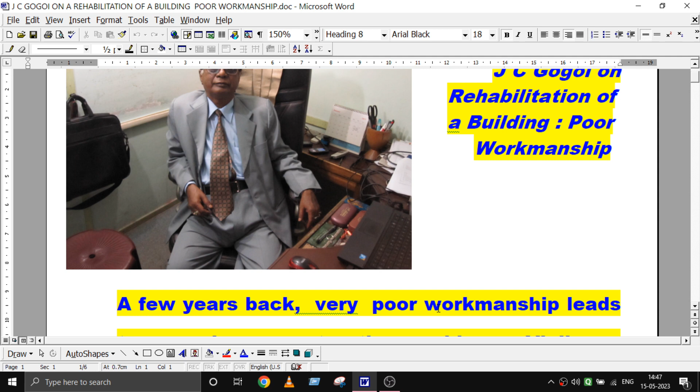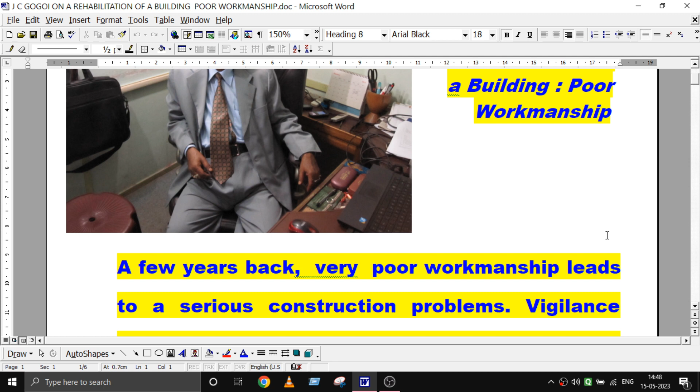Today, I want to say something about the poor workmanship in building construction. A few years back, some residential building complex was constructed at Aparasam. During construction, after removing the formwork, that means after removal of shuttering, some weak portions were noticed. In fact, the matter was so serious, it led to some vigilance inquiry, some official inquiry, since it is some government sponsored company's building.

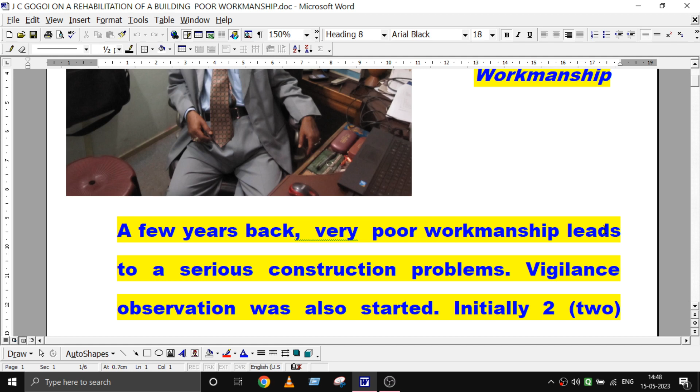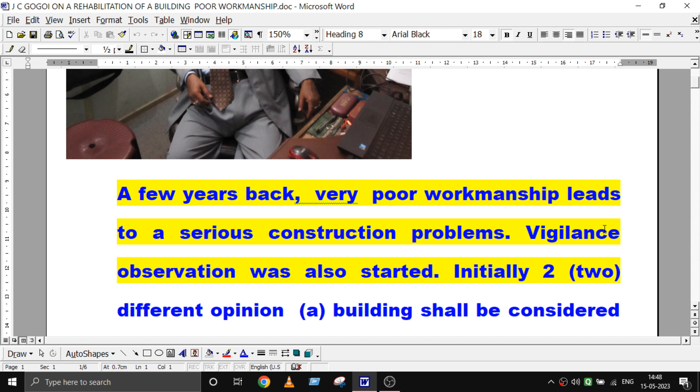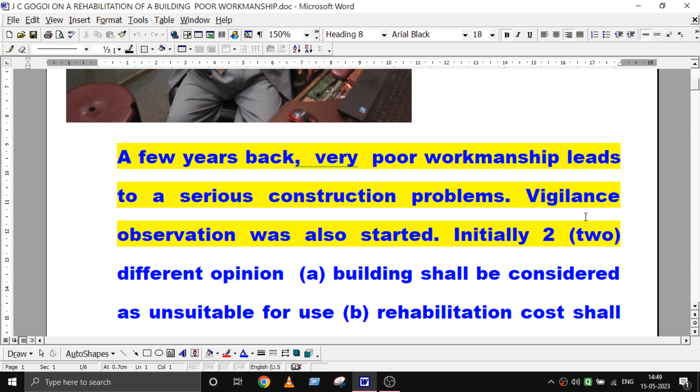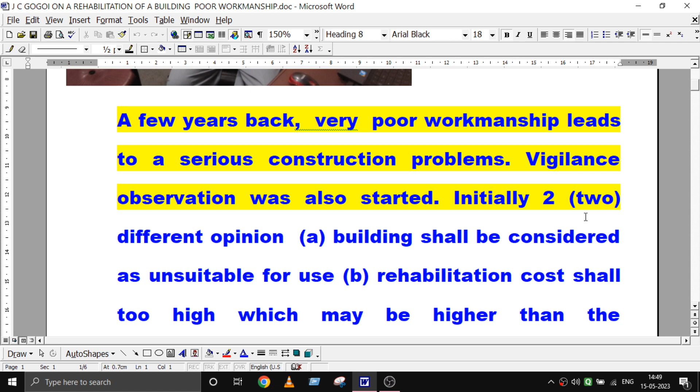During preliminary investigation, there are two observations at the initial stage. One is the building shall be considered as unsuitable for use. Second opinion is rehabilitation cost shall be very high, which may be even higher than the reconstruction works. In both cases, question of responsibility and question of accountability is coming out.

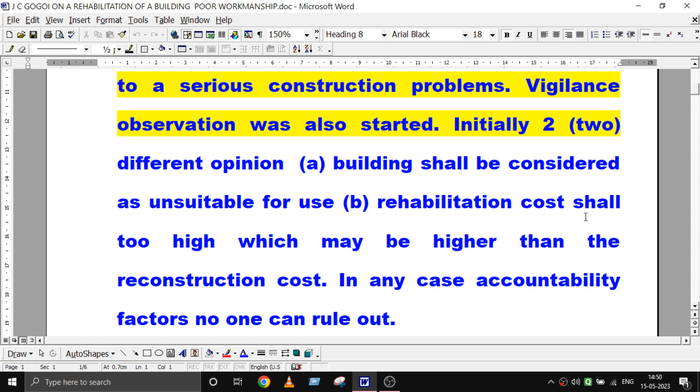It may so happen the builder may lose a huge amount of money, and the supervising authorities, there are some official engineering staff there, will be suffering in service record, maybe some temporary punishment also. A team of experts, all are experts except me, having different opinions belonging to this group. One group is saying the building is not suitable, it should be declared as a damaged one. Another is rehabilitation cost may be too high.

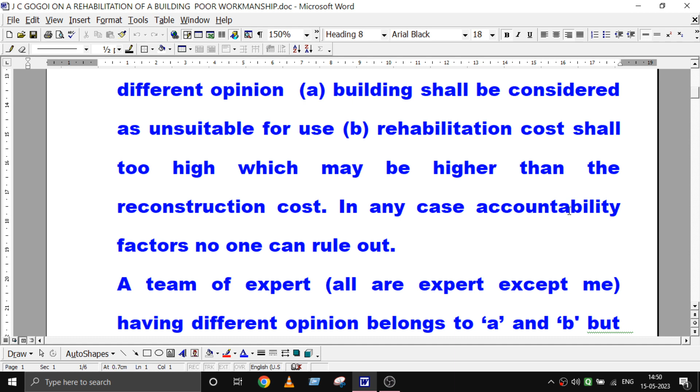But after a lot of discussion, visits after visits to the building sites, finally it has been decided that the rehabilitation cost shall be less than 30% of the reconstruction cost. So if it is less than 30%, then it can be considered as an alternative. There are some government procedures also. If it is higher than 30%, they do not want to accept it because that will be a question of responsibility and accountability. So if it is below 30%, there can be some adjustment and it shall be considered as a working defect, defects which can be permitted.

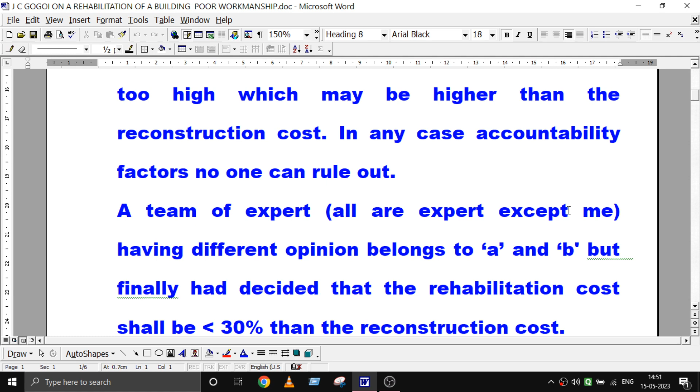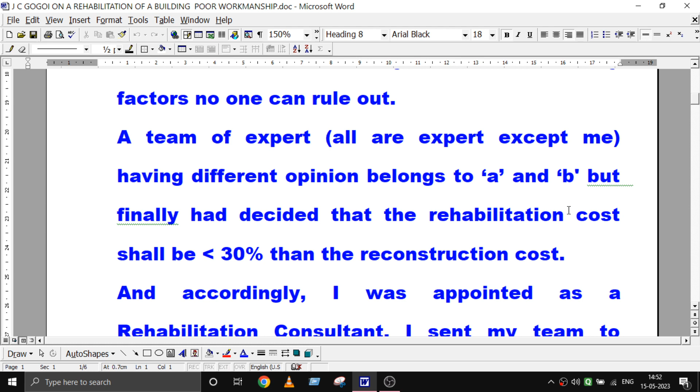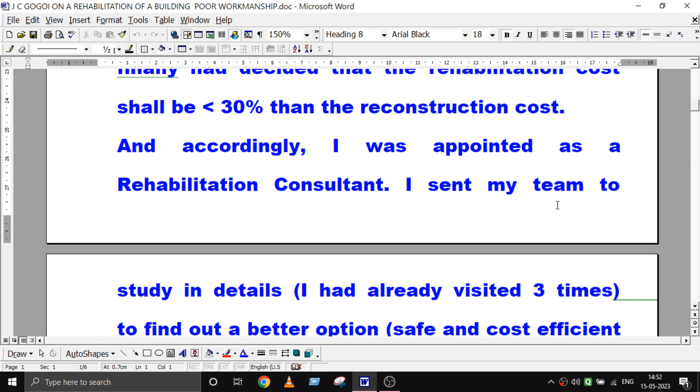Under such cases, I was appointed as a rehabilitation consultant. I visited more than 3 times before my appointment to find out the basic reasons of this type of poor workmanship. After appointment, I sent my team to study in detail to find out the better option, which must be safe. Safety is the prime factor, and cost efficient. If we go for jacketing the whole structure using high grade of concrete, it will be undoubtedly safe, but it will not be cost efficient. Safety, although prime, should be cost efficient.

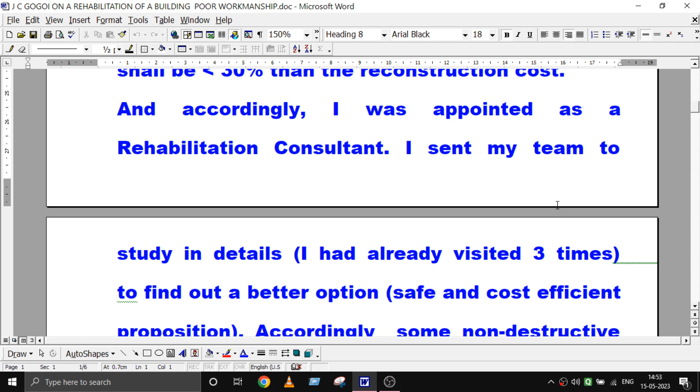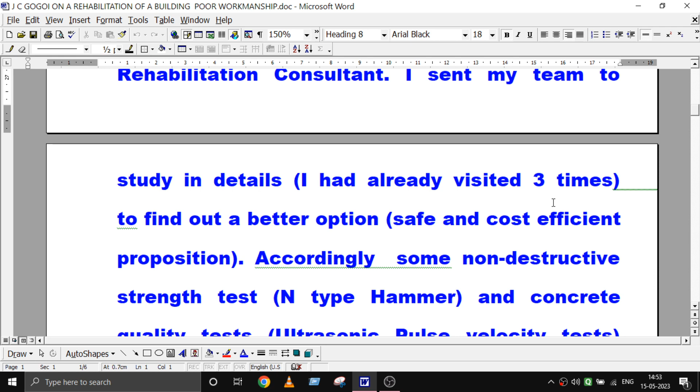So I asked my team, three engineers and two other skilled workmen, to find out all details, and accordingly they conducted some non-destructive tests using rebound hammer for strength and ultrasound tests in some other locations. Not everywhere the building is poor. Somewhere it is poor and somewhere it is above standard. So we conducted the tests, and our recommendation was the building was very nicely designed.

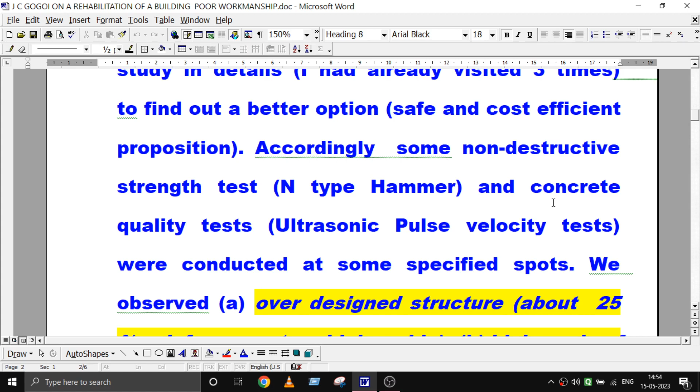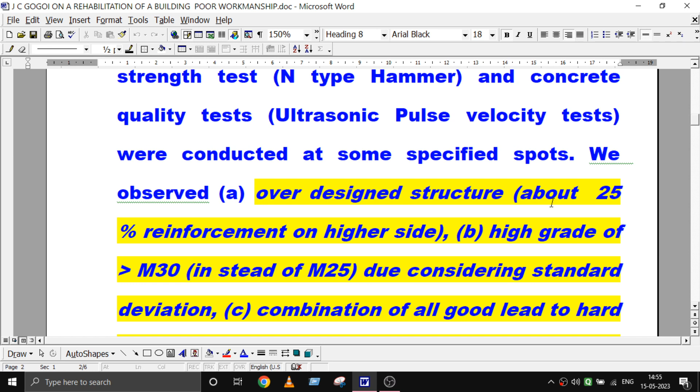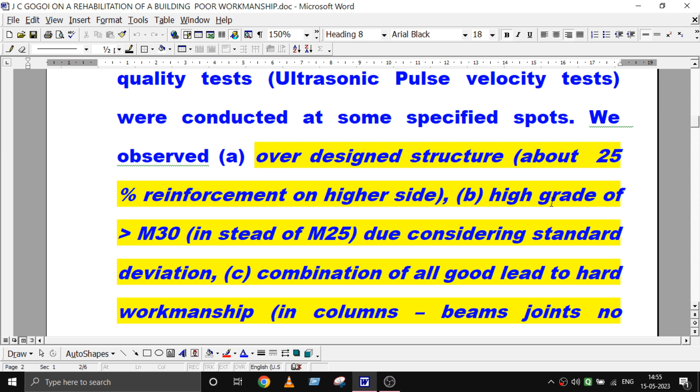The design was an over-designed structure. Reinforcement is 25% higher. Concrete grade was designed for M25, but concrete grade found as M30 considering the standard deviation. And the concrete became so good, and it is the combination of all good that led to hard workmanship. Undoubtedly it is poor workmanship; it is very hard workmanship. Concrete workability is very low.

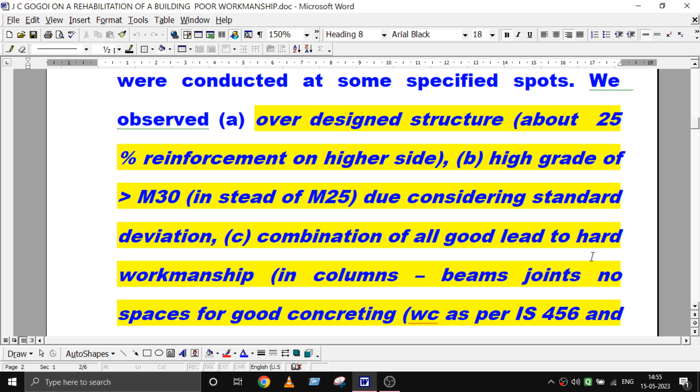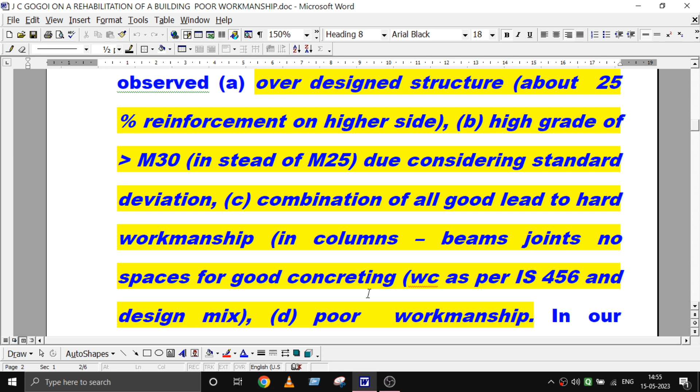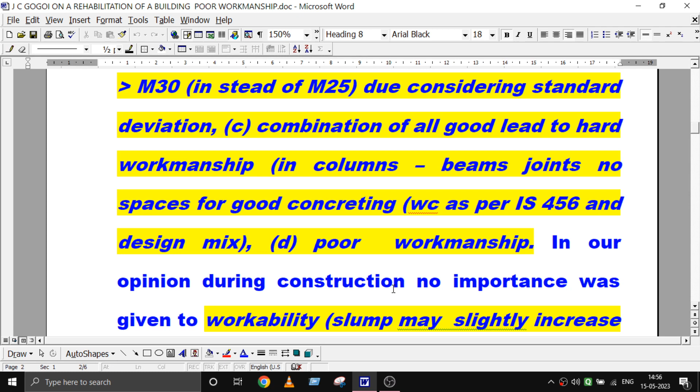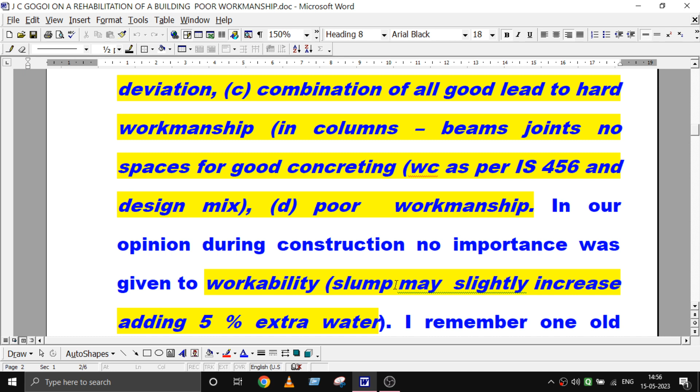In column beam joints, there is no space for good concreting. W/C was maintained as per mix design or as per IS 456. So all this leads to poor workmanship. In my personal opinion, during construction no importance was given to workability. Slump may slightly increase by adding 5% extra water. This will not affect the effective concrete grade.

We remember one old saying, goodness makes worst. If all are good, everything is good, it may turn to worst. There is a Hindustani word, Hindi word, for this.

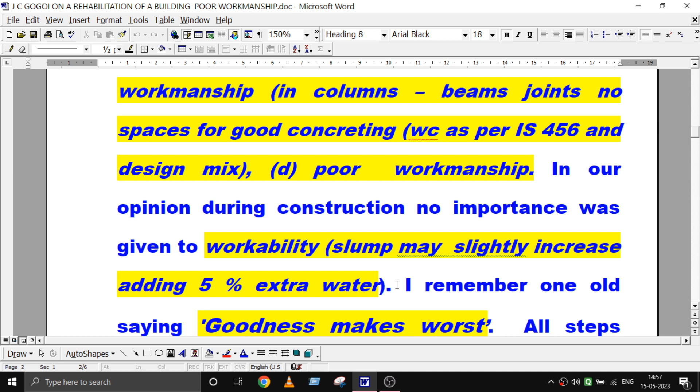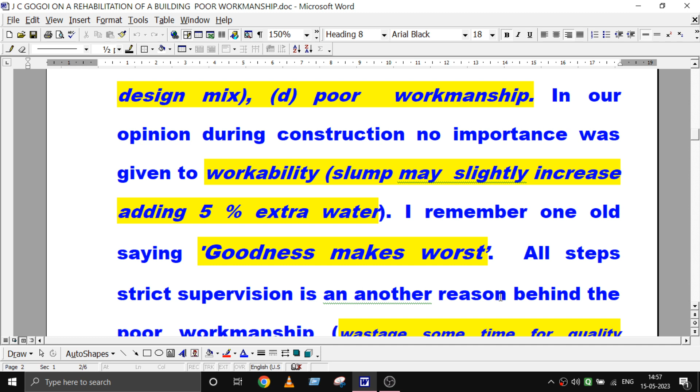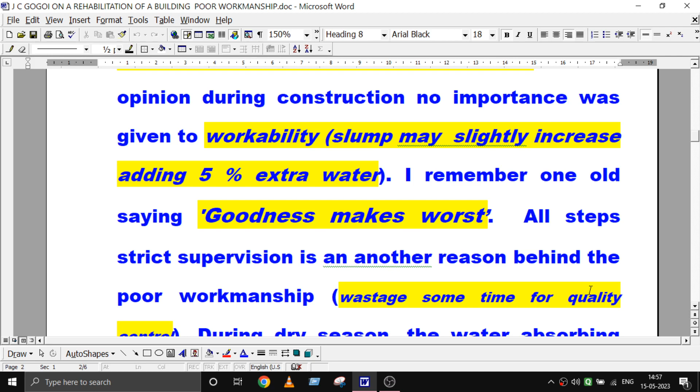See, all goods make worst. Strict supervision at every step is another reason behind the poor workmanship. Strict supervision is necessary, but wasting time on quality control is harmful. Check the slump and concrete mix properly once in the morning. When the material is the same and W/C is the same, the slump will remain constant.

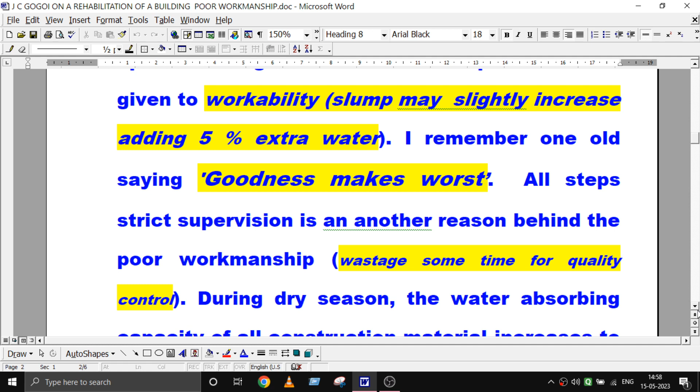For each mix, if we are going to take the slump of each concrete, then it will waste a little time, because slump is an important factor during concreting in dry season. During dry season, the water absorbing capacity of all construction material increases to a high extent.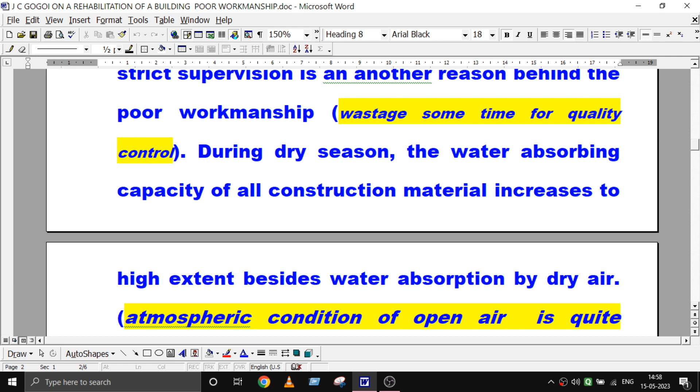Atmospheric condition of open air is quite different from that of laboratory control condition. We should not forget that laboratory atmosphere is controlled. There will be no water absorption. It is already in such a condition that there shall not be any water absorption. But in open air, when concrete is mixed, during that time water absorption shall be there by dry air. So just to take slump, if we require 2 minutes, during that 2 minutes, slump may decrease to a high extent. It became hard.

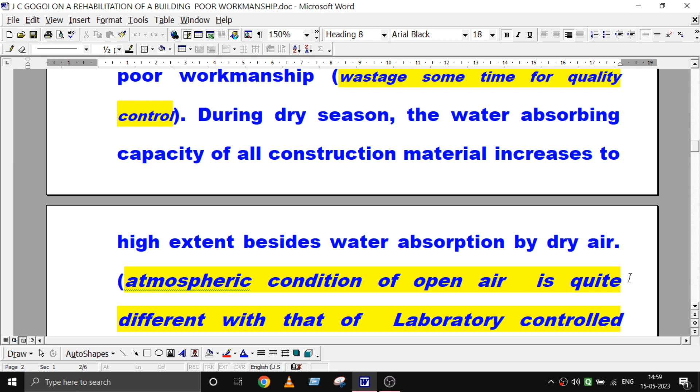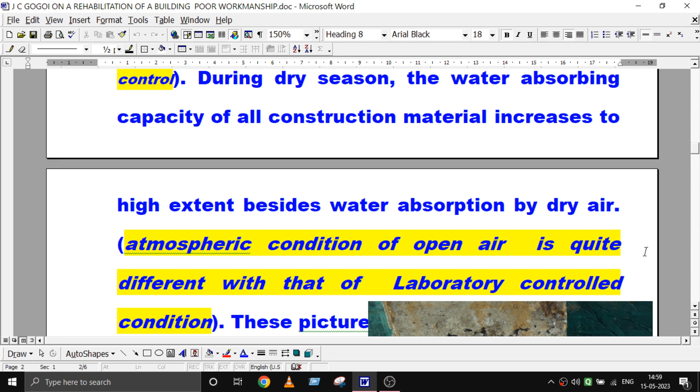So these are our primary observations. Now you see these are the cracks in between column. Because you see this reinforcement, this reinforcement, this reinforcement, and this reinforcement. So many reinforcements are there. You see here also 1, 2, 3, 4, 5. Somewhere where joints are there, gap is decreasing, and these are the stirrups, these are the stirrups and cross stirrups also there.

So how can concrete penetrate? Because all the aggregate sizes are 20 mm down. When it mixes with some amount of cement and sand, it becomes 20 mm to 25 mm, and our gap is very less somewhere. Where joints and lappings are there, in that space, the chances are very less for this concrete to penetrate.

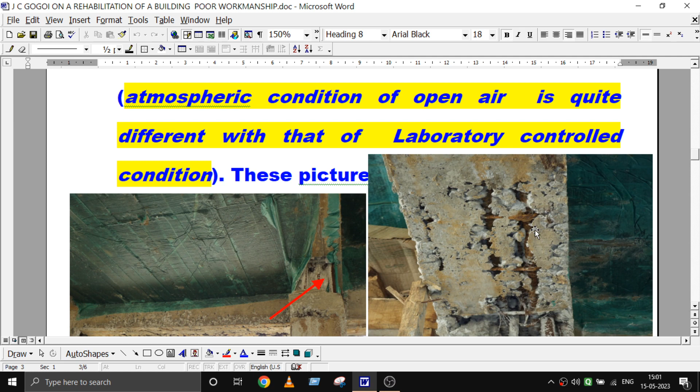So this is one, here it is, because as I told, slump is decreasing due to atmospheric condition. So up to this extent, concrete started initial setting due to dry air condition. Concrete already underwent initial setting. So the chemical reaction between cement and water started. So it became a void.

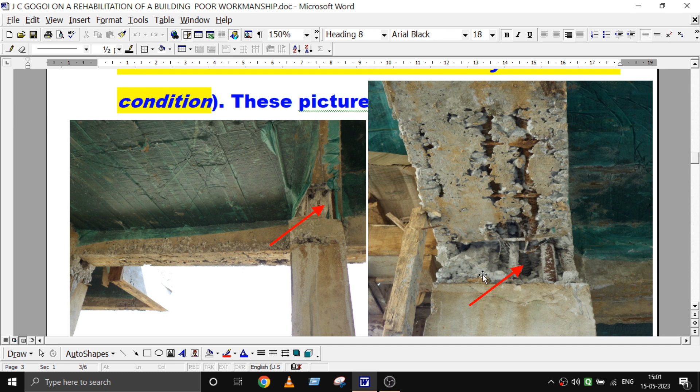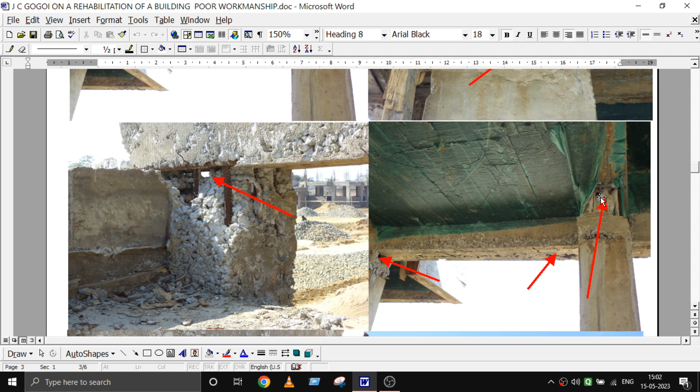This is also, here it is, this is beam slab, where first it should penetrate the beam, second the slab, then it is coming through beams, then it is coming to column. This is column, beam, and slab. So concrete cannot come here. Before that, in this state, concrete has stuck up. So these are the voids. Here also, there are some voids. Here you see the same condition. Same condition.

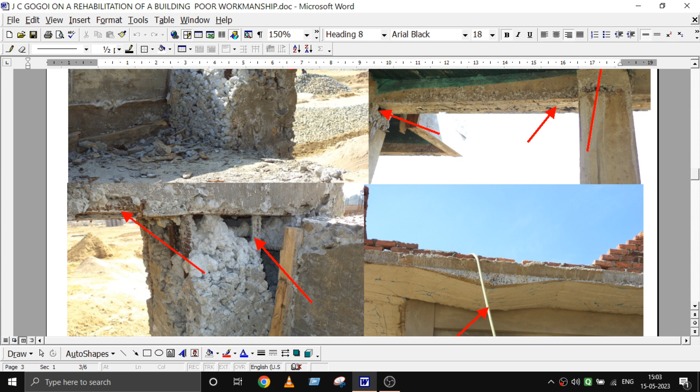They used steel shuttering and timber shuttering, both shutterings they have used. Here, during removal of shutterings, this concrete stuck to the formworks and it took this shape. This is also, and here it was sagging down. It is due to some additional extra load on these formworks, so it is sagging down.

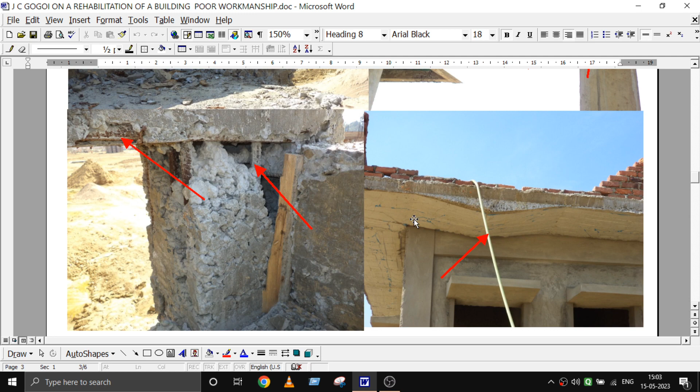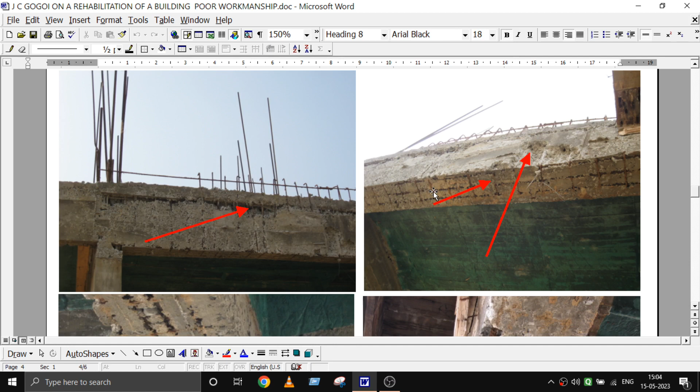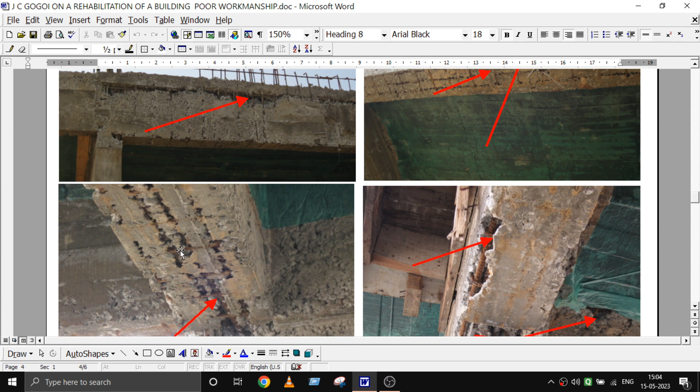Here you see, it looks like they are not using the vibrator, but they used the vibrator very perfectly. In our initial investigation, we discussed each and every one. So we find they are using this vibrator, but all these became voids. Here also you see concrete is not coming from the upper side. Here you see this is also, here a big hole is there, as if it remained unconcreted.

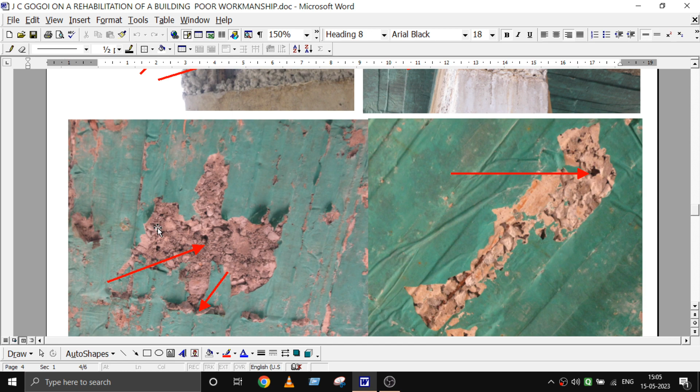These are only aggregates, fines are not going there. Yeah, you see, these are only aggregates, no fines are there. This is the state of the building. We have conducted load test on slab at the better portion. Some better portions are there. We have conducted load test on slabs.

Fortunately, no deflection was noticed up to a load of 500 kg per square meter. As per IS code it should be 450 kg per square meter, and permissible deflection is a few millimeters depending upon width and length of the slab. But here we do not notice any deflection, so it is an over-designed slab. Putting some wooden board is sufficient. So we do not worry about anything.

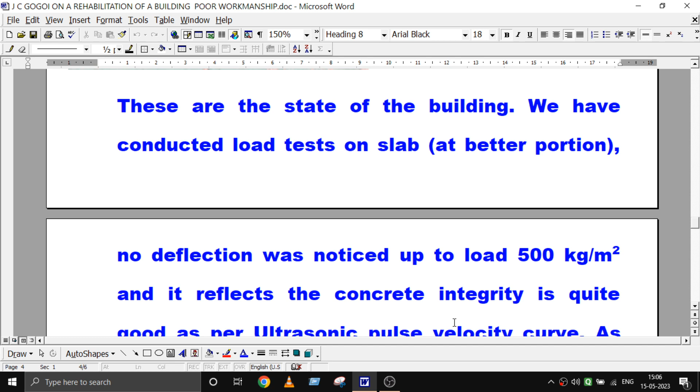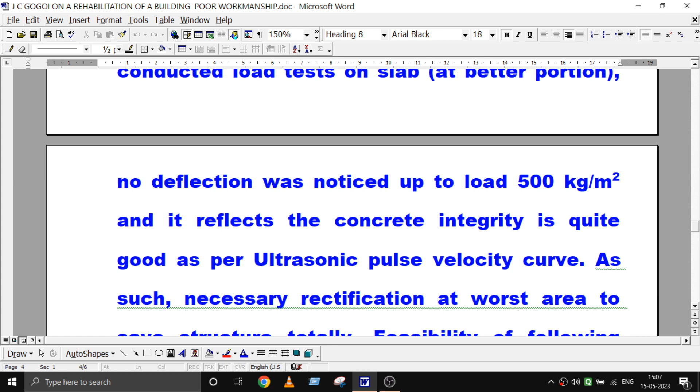These results also reflect that the concrete integrity is quite good, and it is as per our ultrasonic pulse velocity test also; from that curve, we noticed all are in the good portion, all are excellent quality of concrete. Somewhere it is 4 kilometers, somewhere it is 4.5 kilometers. In no case is it less than 4 kilometers. As such, we find rectification at the worst area necessary to save the structure. It is totally possible.

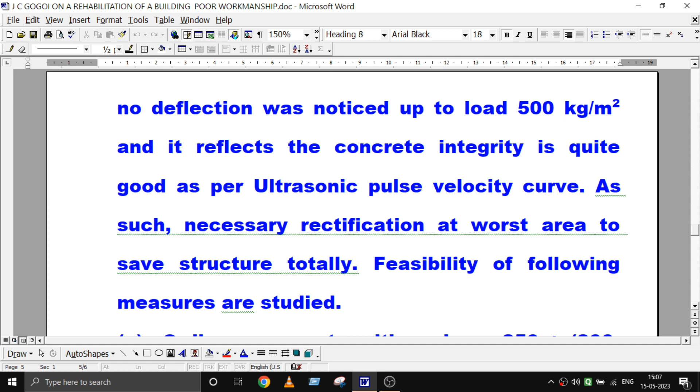Normally we prefer 150, and in worst condition it will be 175; 175 and 150 is preferable for our workmanship. But in this case we want to make it semi-solid, it shall be on the higher slump so that it can penetrate using some funnel type instrument so that we can penetrate it like water.

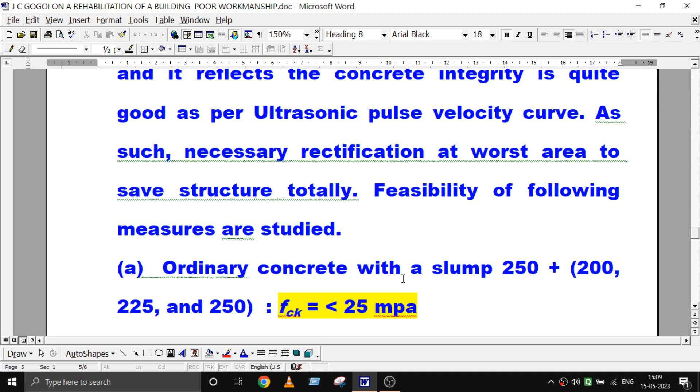Second option, epoxy grouting. Epoxy grouting is the best option for rehabilitation of RCC works. Its strength is 20 after 24 hours. Strength is more than M75.

But it is too costly, since special professional agencies should be engaged. They always take the higher side, which is ordinarily much costlier than other treatment. So we considered epoxy grouting to be very high in cost and inefficient, so we ruled out that chapter.

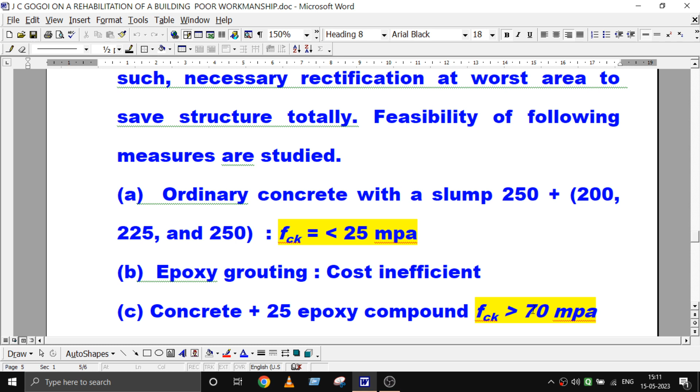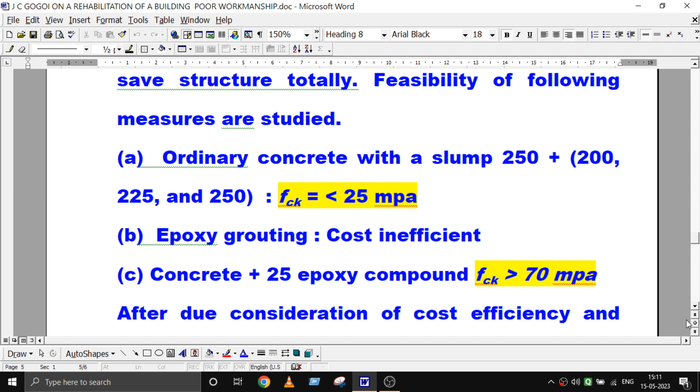So we studied these three options, and after considering the cost efficiency and the execution suitability, because everyone has complained against the consultant. It is very easy to say or write or draw with a pencil. Instead of an RCC 32 rod, a consultant is just using a pencil, and in 1 second there will be a line. There will be a rod, but it is on paper.

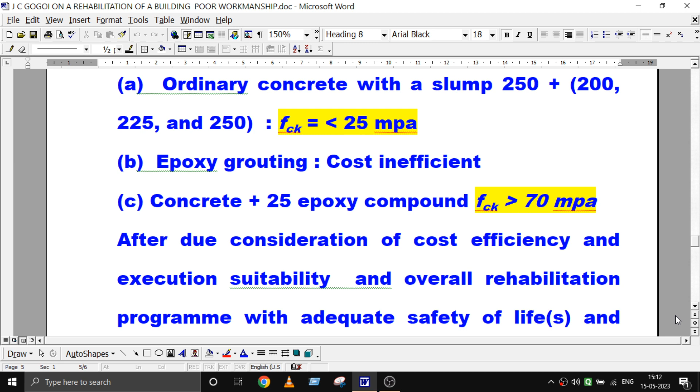So in consultancy, we are not investing much money. So all have some complaint that what consultants say cannot be done practically. So I have a peculiar concept: it must be execution suitability. Unless execution suitability is there, no one can do perfect work. It is my concept. So our prime objects are safety, cost efficiency, and execution suitability for the overall rehabilitation program with adequate safety of lives and property.

So what we suggested, in our group, we have one chartered engineer and two young engineers. They are also working very hard. In our opinion, M30, that is to get M25, M30 concrete, and the gravel size, instead of 20 mm, should be 12 mm down graded, less than 12 mm, 12, 10, 6, like this type of gravel. It should be uniform. Not all should be 6 mm; 12 mm graded downgraded gravels.

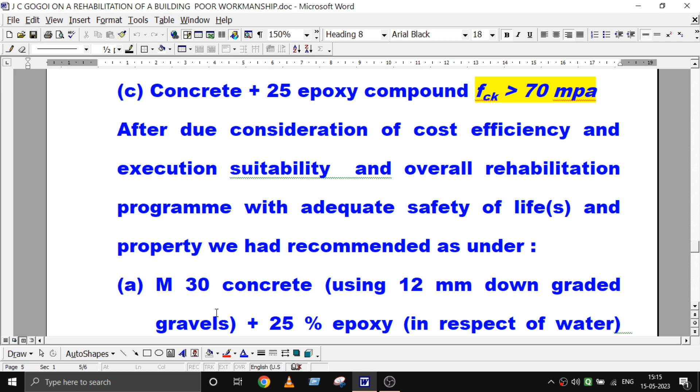Normal concrete for M20, M30: what percentage of gravel is required, how much sand is required, and the water-cement ratio remain as they are. But in addition, say the water required per bag of cement is 18 liters, or 20 liters, whatever it may be, preferably 18 liters per bag is good enough. And with that, we add 25% of epoxy in respect of water only, not the volume of the total concrete. If you use 18 liters per bag, 18 liters plus 25% of 18 liters of epoxy, we should make the concrete.

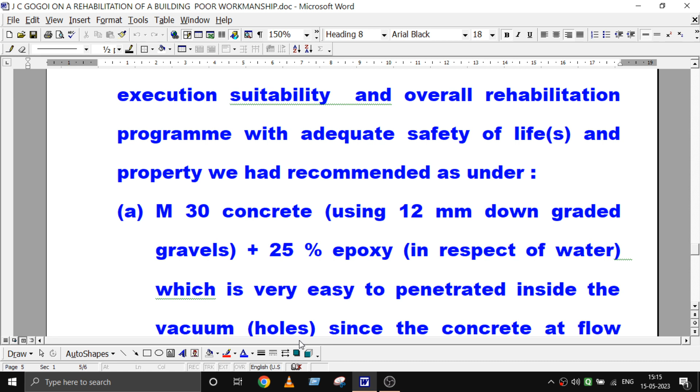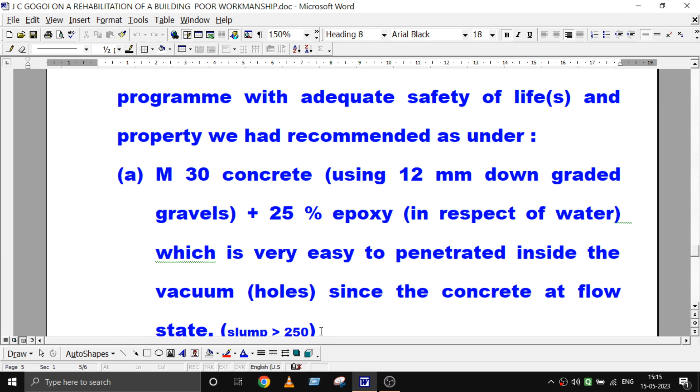It is very easy to penetrate inside the vacuum holes, since the concrete at that state will flow like a semi-liquid substance, with slump 250 onward; it should not be less than 225. We recommend 250. Slump shall be 250, greater than 250. In such cases, what happens? Initially, some repairing works on joints were conducted in my presence. It is very smoothly and properly workable.

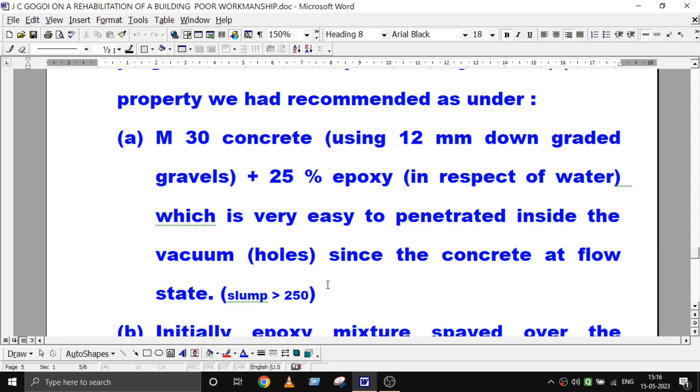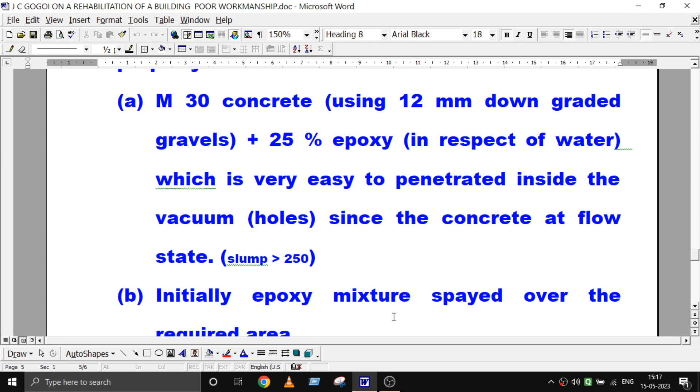And initially, half an hour before doing anything, the epoxy mixture. In epoxy there are two parts: one is hardener, another is adhesive, both mixed in equal 1:1 ratio, 1 kg to 1 kg. That mixture shall be sprayed over the required area as the first step. The spray machine is very simple, hardly 7,000 or 8,000. The only problem is mixing and cleaning the instrument. Proper mixing and cleaning of the instrument is the major requirement of that spraying.

Next, cement mortar. There are some areas we saw where the strength of the slabs at the upper side is quite perfect. Only in some lower portion, where loads are transferred to reinforcement which is not duly covered, we suggested that the cover may be made by cement mortar with 25% epoxy mixture. After spraying this epoxy mixture, plastering can be done with this cement mortar with 25% epoxy mixture. It will be good enough for covering the reinforcement. So this will serve the purpose.

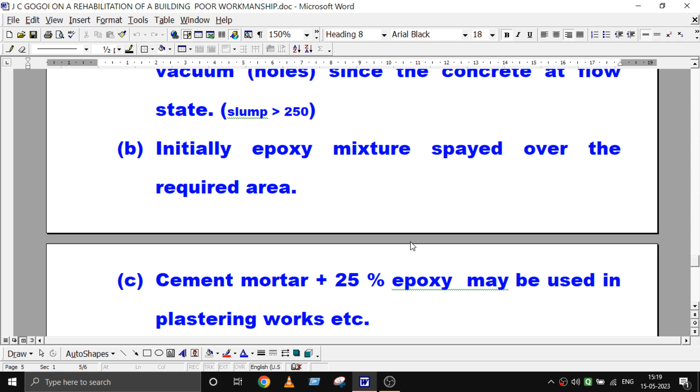This is a simple process. Our total estimated cost is less than 30%. That is also in our mind. We cannot exceed the limit of 30%. If it is 30%, some people will suffer. Some engineers, some builders, some other workmen, they will also suffer. Somebody may lose their service. So I do not want to do so.

So within that 30%, I want to complete everything, which is finally reported to be less than 20%. But it is unofficial information to me that it is less than 20%. But in the written certificate, they said it is less than 30%.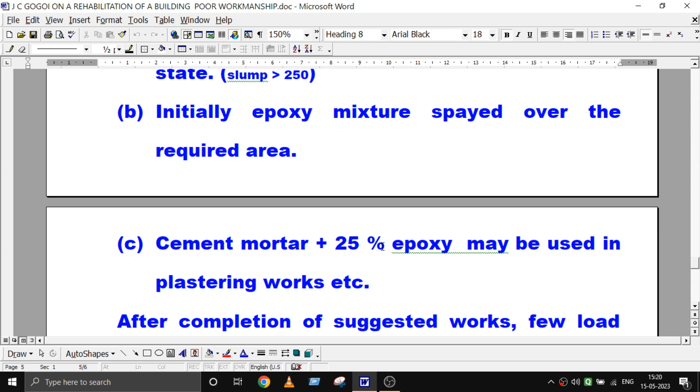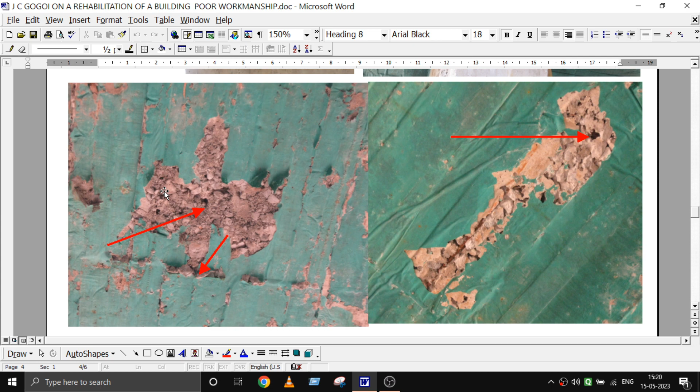After completion of all these suggested works, all repairing works, here I want to show one thing. You see, these are the things. After reinforcement, concrete is there. Outside this reinforcement, no cover is there. Here it is, no cover is there. This can be done using rich mortar. It can serve the purpose.

And here we seal this side and we seal this side also. Then here we arrange one conical flux from where we are pouring down that concrete. In these also, we seal this portion, we seal this portion also, making a V, making an L, not V, making an L, we seal it with an open hole using a conical flux.

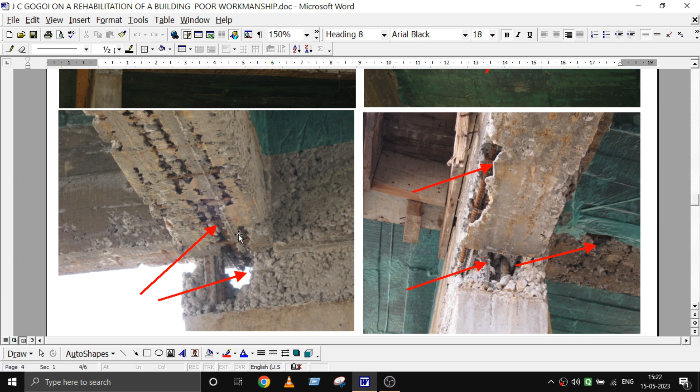We penetrate the concrete mix, which, as I earlier explained to you, the workmanship is very good, and it is a material. This compound has good workability, and its purpose is sealing the voids fully. So this was very nicely completed. The rehabilitation was completed.

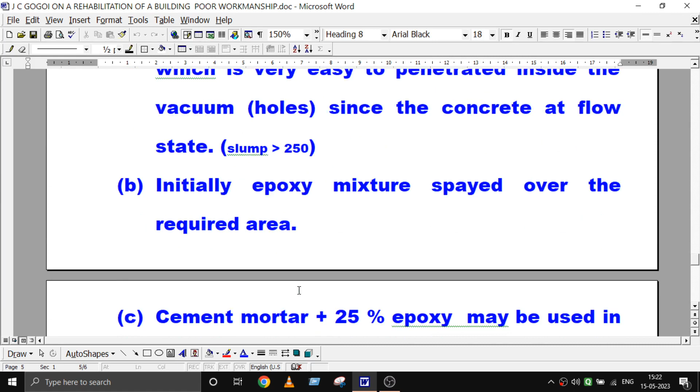So finally, after completion of all suggested works, a few load tests on slabs were conducted more than 500 kg per meter square. No deflection was noticed. Rather, it behaves much better than earlier. Some non-destructive tests, normal strength tests, 150 cube molds are taken at every step, and the tests were also conducted in every repairing zone, every repairing area.

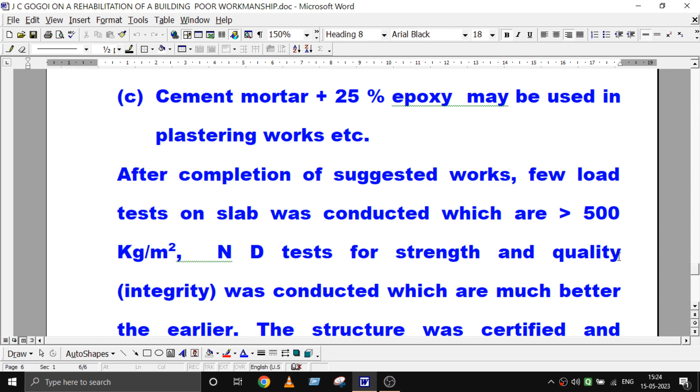Quality, which we normally call integrity, whether any hair-like cracks or voids are there or not, was checked using pulse velocity, which is more than 4.5 kilometers per second. So everything found that the repaired portion is much better than the original one. So finally, on getting 100% satisfaction from the client, we certified the structure and declared it in all respects safe and stable.

We hope this is a different issue, not poor quality. It is some mistake we did due to our very strictness about quality. Or we can say we are not properly utilizing our six senses. If we properly use them, my wet handkerchief, which I use to clean my sweat, just dried up in 5 minutes in sunlight without getting any extra heat. So I must realize whether the 150 slump will work as 150 or not.

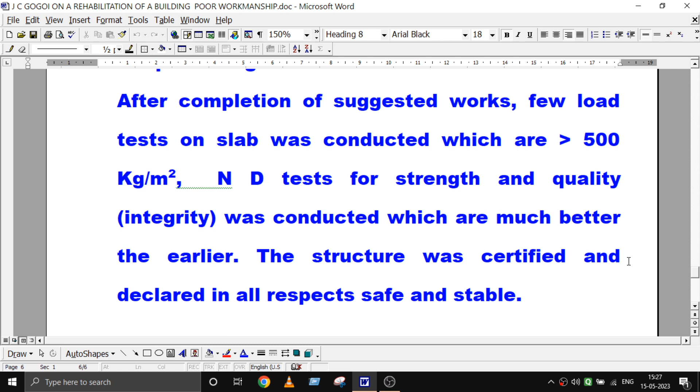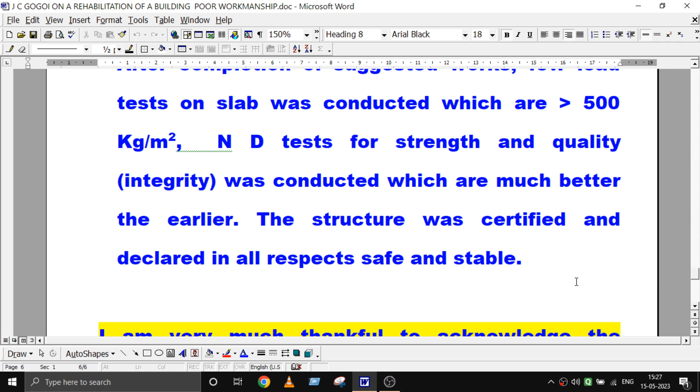I always tell you, to get something better, if necessary, you should compromise with something. If necessary. If my target is to do something good, then what is the harm of compromising a little in some steps? I am always saying that I never say lies, and I always say truth. But I can say thousands and thousands of lies to save one building. To save one life, I am ready to say thousands and thousands of lies. So I am presenting this very special topic because there is no quality compromise, yet these are the problems.